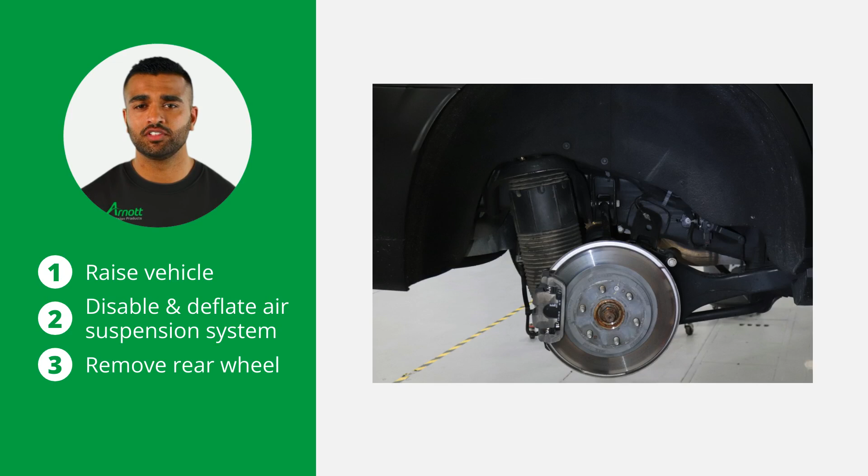Start by raising the vehicle. Once this is done, you can disable and deflate the air suspension system according to the manufacturer's instructions. Next, remove the applicable rear wheel.

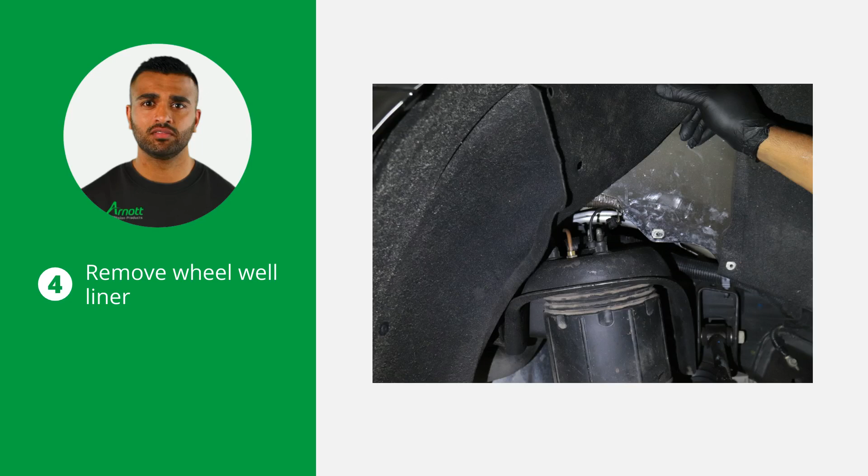Now that the wheel is removed, remove a portion of the wheel well liner to gain access to the top of the strut tower. Once you've gained access, disconnect the electrical connector from the strut.

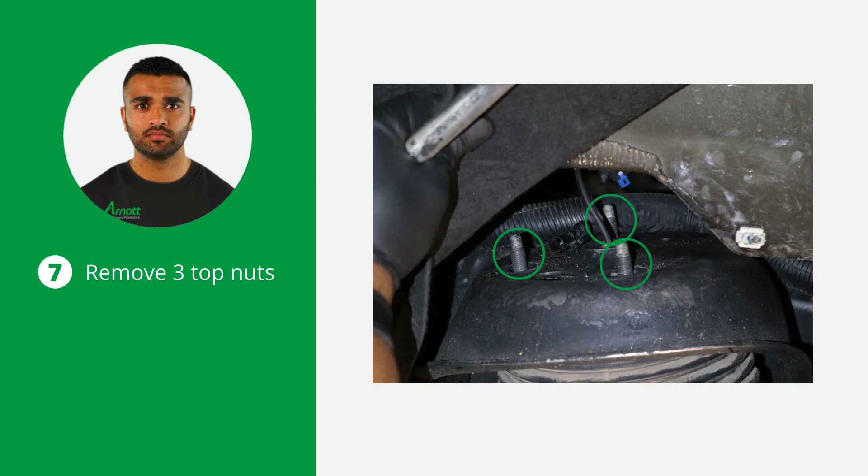Now disconnect the brake line bracket from the lower control arm. Disconnect the lower control arm from the wheel hub. After disconnecting, it's time to remove the lower strut mount bolt.

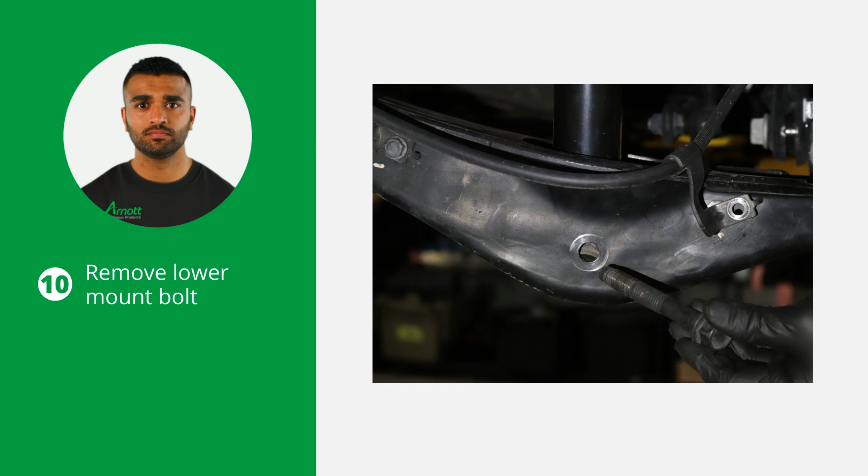At this point, you can safely remove the strut from the vehicle.

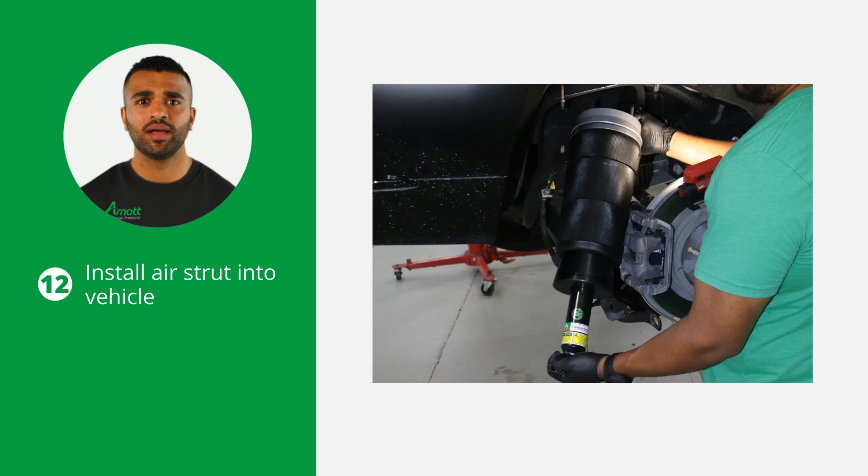Let's start the installation of the new Arnott air strut. During the installation process, make sure to tighten all nuts and bolts to the vehicle manufacturer's specifications. Start by installing the new Arnott air strut into the vehicle.

Install the 3 new included top nuts and tighten to manufacturer's specifications.

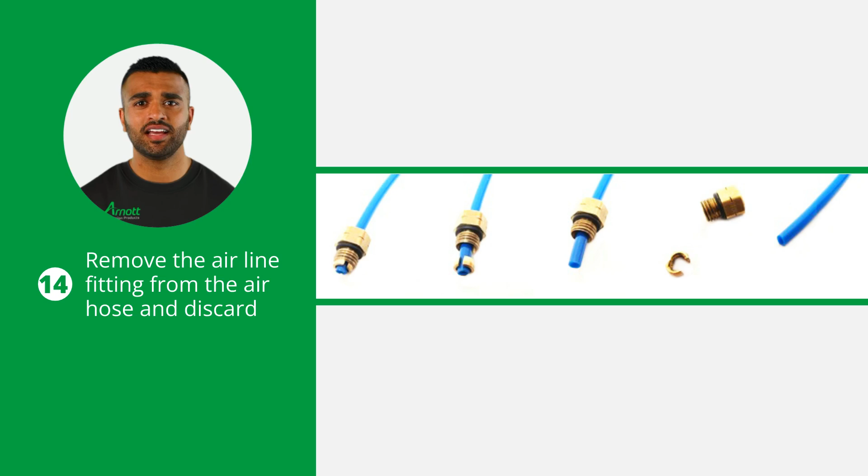Prior to inserting the existing airline into the new air strut, you will need to remove the old original equipment airline fitting and discard it. To do this, remove the collet and the remaining fitting will slide off the air hose. Now that the old airline fitting is removed, you can insert the existing airline into the new air fitting.

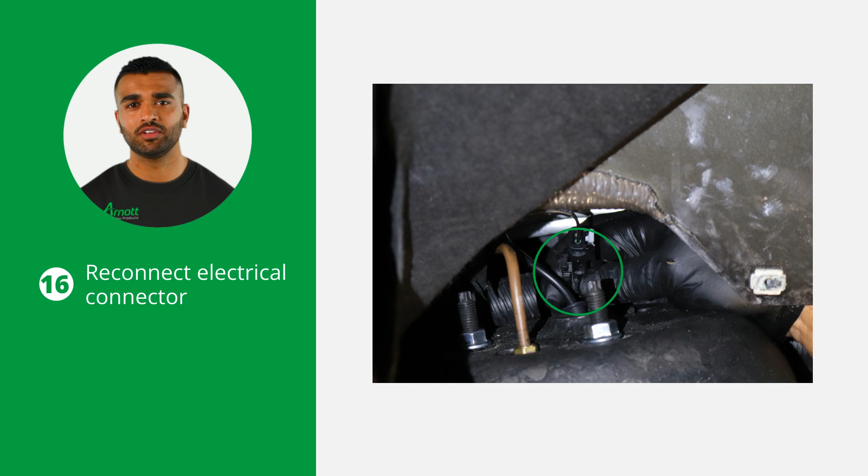Next, reconnect the strut's electrical connector. Reinstall the lower strut mount bolt and tighten to manufacturer's specifications.

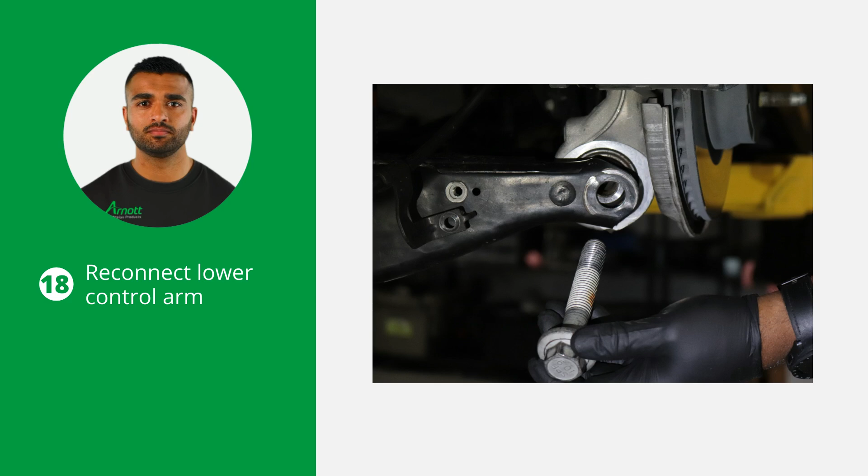Reconnect the lower control arm to the wheel hub. At this point, reconnect the brake line bracket to the lower control arm. You can now secure the wheel well liner and reinstall the wheel.

Lastly, enable and inflate the air suspension system, and the installation is complete.

Thank you for following our guide on replacing the rear air strut for various GM SUVs, GMT1xx, with an Arnott part. Proper installation ensures the longevity and performance of your vehicle's suspension system. Stay safe and happy repairing.